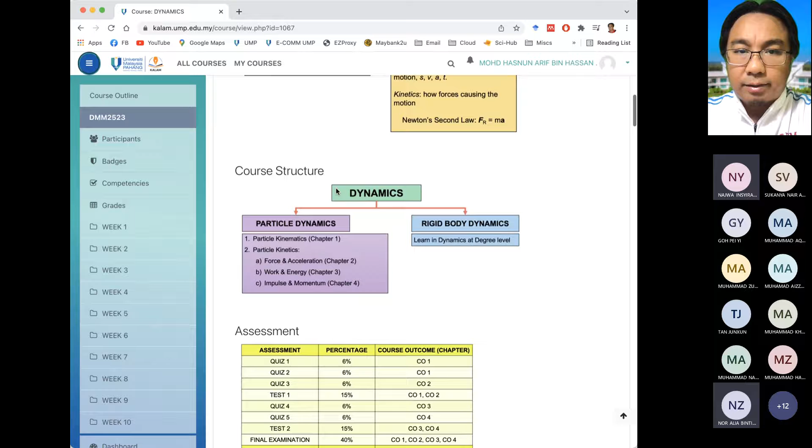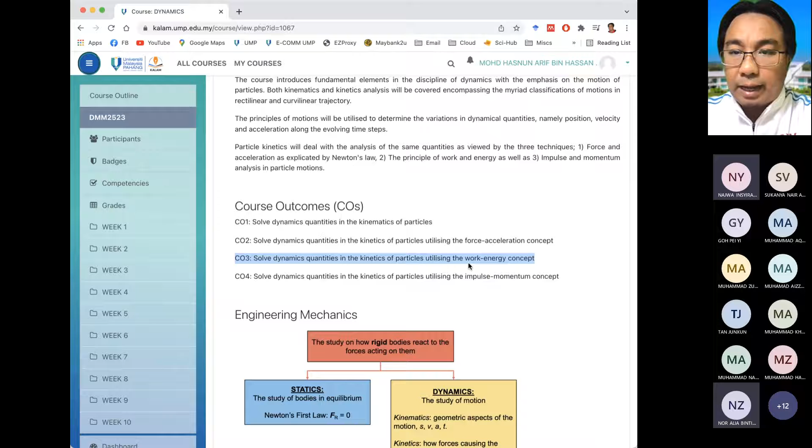Before I start, I want to highlight a bit about the content of the course. Let's look at the content of the course. We have covered course outcomes number 1 and number 2, based on the chapters. We finished chapter 1, we finished chapter 2. Now we are discussing chapter number 3, which is solving dynamics quantities in the kinetics of particles utilizing the work energy concept. So we are currently learning about work and energy.

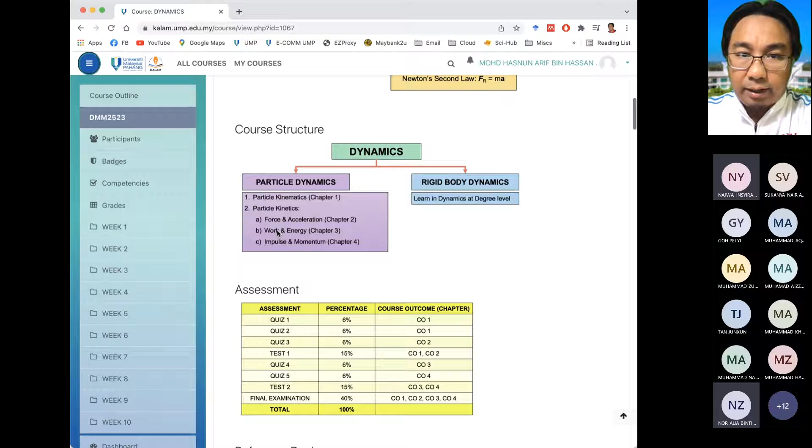Basically, like what I have shown in the course structure, we are currently at chapter number 3.

Now I would like to talk about the assessment. As we discussed in the previous class, most of you agreed that we are going to repeat quiz 1 and quiz 2. So far what we have conducted is quiz 1, quiz 2, and test 1. In total that's 6%, 6%, 15%, so 27% altogether of the assessment we have conducted.

I am planning to do the quizzes: repeat quiz 1, quiz 2, and quiz 3 which we haven't done yet, covering chapter number 2, plus quiz 4 covering the chapter we are currently discussing, which is chapter 3.

I am planning to do all the quizzes, quiz 1, quiz 2, quiz 3, quiz 4, on Monday next week. We will do this face to face in Dewan Kuliah 300 in FTKMA. Do you have any problem with that date?

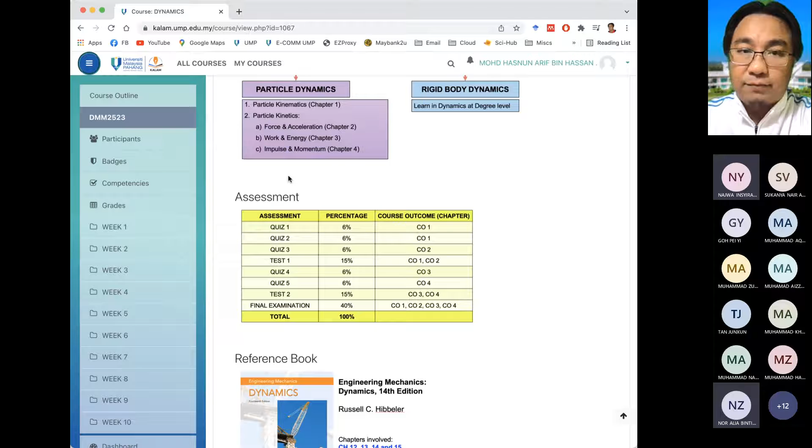Going back to the lecture that we have covered so far, I have uploaded the videos for lecture week 9, which we did online through Microsoft Teams. This is the video, and this is another video from last semester, so you can watch both videos. Perhaps it will increase your understanding on the topic we are currently discussing.

This is week number 10. Basically last week was week 10 for 2 days, and this week is still week 10. So this is what we are going to cover today.

I have also uploaded the video from the previous semester, so you can watch these two videos, and the recorded video from today I will also include in week 10. By next week we will finish with chapter 3. Today I will cover the principle of work and energy as well as power and efficiency, and next week we will cover the conservation of energy, finishing chapter 3.

On Monday next week we will finish chapter 3 and also do the quizzes. On Wednesday we will go into the last chapter, chapter 4.

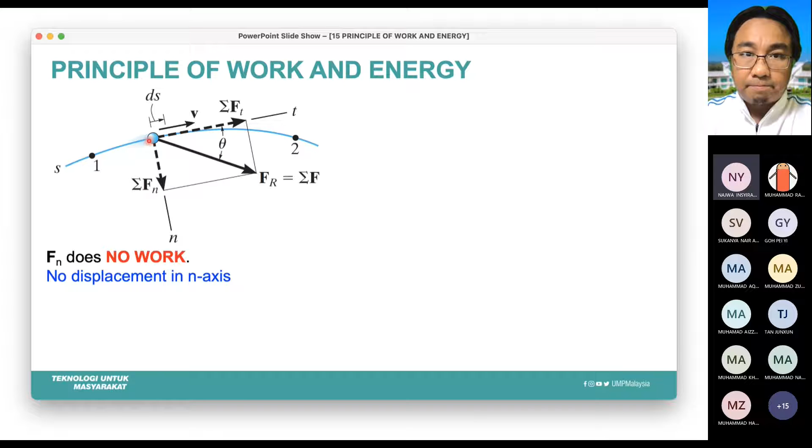So if we look at this particle moving from position 1 to position 2, the particle in blue, the object, is moving from position 1 to position 2. Since it is moving in a curvilinear path, kita boleh pecahkan dia kepada components in tangential axis, this is tangential axis T.

So akan ada force in tangential axis, dan kita akan ada normal axis pointing to the center of rotation, center of the circle, center of the arc of the path, pointing to the center. This is the normal axis, so we are going to have forces in normal axis as well.

So ini dia punya resultant force, force vector is in this direction. So force ini kita boleh pecahkan kepada tangential axis dan juga normal axis.

But because the particle is moving to the right in tangential axis, we know that normal forces in normal axis tidak menjalankan apa-apa kerja because there is no displacement in normal axis. Displacement hanya berlaku pada tangential axis. Displacement maksud dia objek ini bergerak pada tangential axis, objek ini tidak bergerak atas bawah pada normal axis. So tidak ada kerja yang dilakukan oleh forces in normal axis.

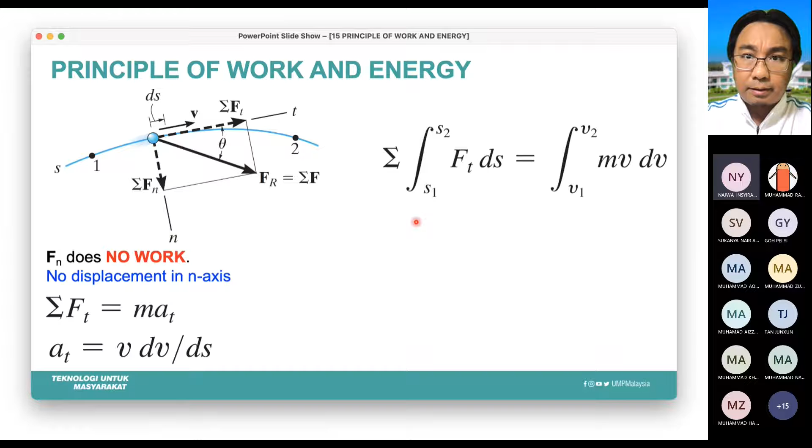From here, if you look at this equation, we can combine these two to get Ft ds. Kita rearrange ds ni ke sebelah kiri, so Ft ds is equal to mv dv.

So we can do the integration. Ini saya hanya menunjukkan macam mana equation ini terbit. Nanti you tak perlu derive equation ini dalam test ataupun final exam. What you need to do is just use the equation, tapi saya hanya menunjukkan macam mana equation ini datang.

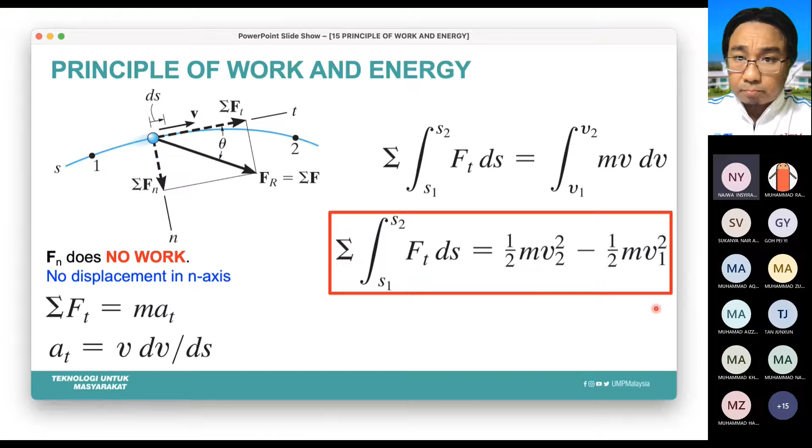So in the end, on the right hand side, mv dv, kita akan dapat v square over 2. So dia akan jadi 1/2 mv2 square minus 1/2 mv1 square, because the lower limit and upper limit is v1 to v2. Just focus on this equation here.

So what we have on the left hand side, F kali displacement, ds is the change of displacement. F kali displacement ialah work done. So bila kita tengok daripada S1 hingga S2, dia bermaksud work done to move from position 1 ke position 2.

So on the left hand side of this equation is basically the work done to move from 1 to 2. Work done we already learned in the last class - work done by force, work done by weight, work done by spring. On the right hand side, this is basically kinetic energy. 1 over 2 mv square is kinetic energy.

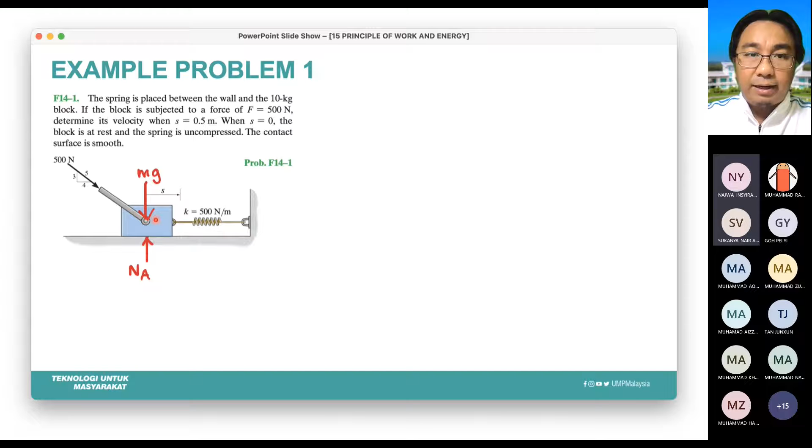So we draw the free body diagram - there's mg downward, N upward, and 500 Newton force which we can resolve into x and y axis. The x axis component is 4/5 times 500. I already explained last week how you get this - this is trigonometry using the triangle given below.

And the component of force in y-axis is 500 times 3/5. So from this we know that mg, N, and also this component of force are not doing any work because the direction of these three forces are in the y-axis, while the block is moving in the x-axis. So all these three forces are not doing any work.

The ones doing work are only this component of force, 500 times 4/5, and also the spring, because the spring will be compressed. So the spring will do work and also the x component of the 500 Newton force will be doing work. So UF we already calculated last week is 500 times 4/5 times the distance.

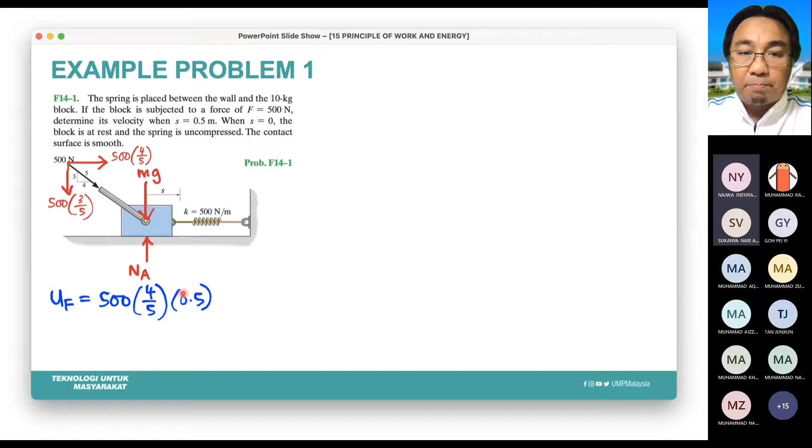Okay, the force dia, component of force, is 500 times 4/5, and to calculate the work done we have to multiply with the distance. The distance is 0.5. So traveling 0.5, we got 200 joule for UF.

And then US, work done by spring, is minus 1/2 times K. K is the spring constant, 500 Newton per meter, given in the question. So US is minus 1/2 K times S2 square minus S1 square. S2 and S1 are the elongation, pemanjangan spring.

Okay, so it says when S equals 0, the spring is uncompressed. Maksudnya pada position yang pertama, iaitu S1 ini, spring tidak ada pemanjangan, dia berada dalam panjang asal, the original length, uncompressed.

So from this statement, we know that S1 equals to 0, because the spring is uncompressed pada position yang pertama.

Pada position yang kedua, berapa banyak dia dah compress is equal to berapa banyak blok itu bergerak. So apabila blok bergerak 0.5, maksudnya spring itu compress sebanyak 0.5 juga.

Blok bergerak ke kanan 0.5, therefore the block will compress the spring sejauh 0.5 meter. So S2 pun sama dengan 0.5 meter, sama dengan distance of travel of the block.

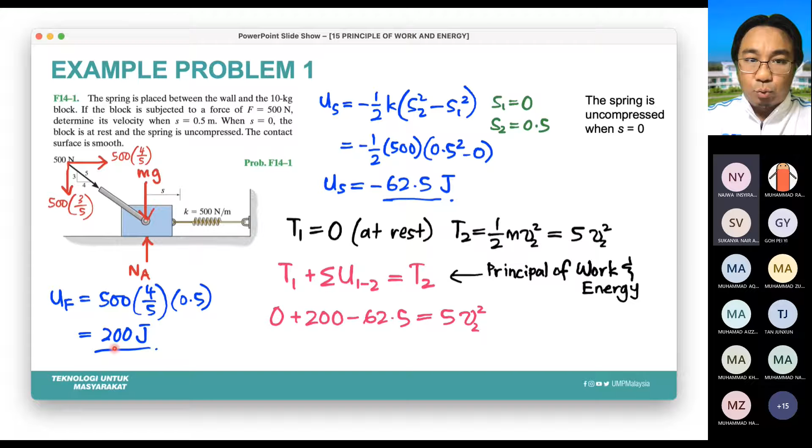T1 tambah total work done sama dengan T2, and now we substitute all the values. T1 sama dengan kosong. Total work done ini kita ada 200 minus 62.5, so plus 200 minus 62.5. T2 is 5 V2 square.

So then we have V2 square dalam equation ini, which we can solve. 200 minus 62.5 dapat berapa? Bahagikan dengan 5 dan you have to square root it to get V2 equals to 5.24.

Meter per second. So by using the principle of work and energy, we are able to solve this problem to calculate the velocity. Do you have any question?

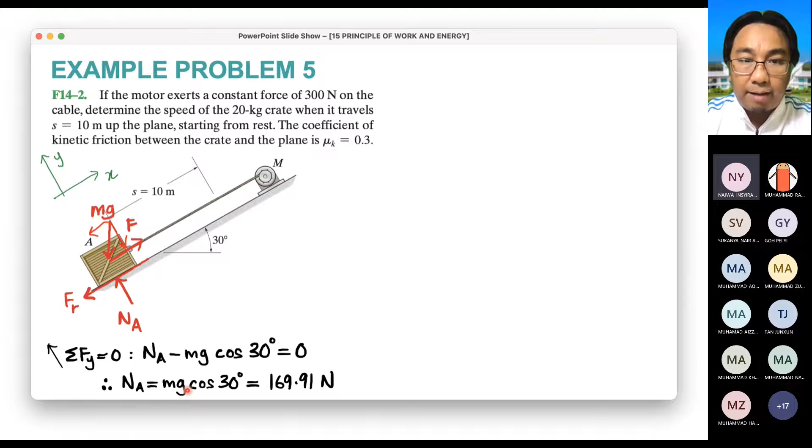Where does the 30 degrees come from? It comes from here, since this angle is 30 degrees, the angle down here is also 30 degrees. So with mg cos 30 degrees, you get the component. From here, we can get the value of NA: NA equals mg cos 30. Bringing mg cos 30 to the right, you get NA equals 169.91 Newton.

Once we have the normal force, we can calculate the friction force. Friction is mu K times NA, so 0.3 times the NA we just found, giving FR equals 50.97 Newton. Once we have the friction force, we can calculate the work done by the friction force.

Remember, friction force ini bertindak ke arah yang berlawanan, bertentangan daripada arah box ini bergerak. Therefore, bila kita calculate work done by friction, kita kena jadikan dia negatif. So UFR, work done by friction, adalah minus friction kali delta S. Delta S ni berapa jauh the box has travelled, iaitu 10 meter. So you get minus 50.97 times 10 sama dengan minus 509.7 joule. Ini work done by friction.

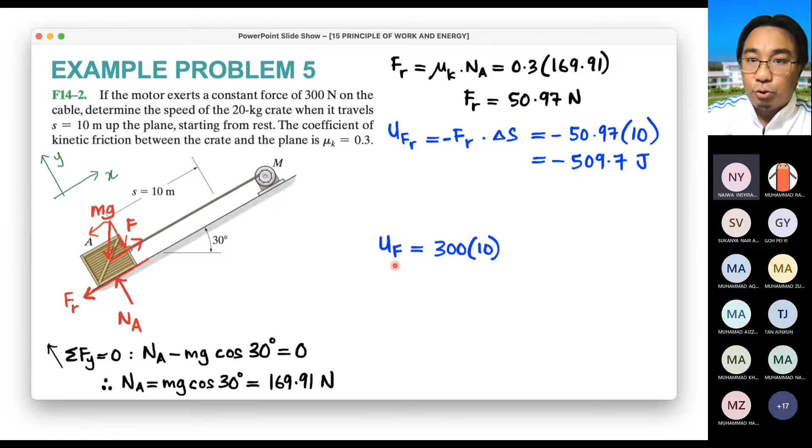Next thing is to calculate the most easiest, work done by the force exerted by the motor, 300 Newton. So UF sama dengan 300 darab dengan distance travel juga, iaitu 10 meter. So 300 times 10 meter you dapat 3000 joule. Ini work done by the force of the motor, UF.

Tadi UFR, work done by friction, negatif because friction bertindak pada arah yang bertentangan. Okay, what's left is the work done by weight. Sebab weight ada perubahan, weight pada asalnya kotak ini berada di bawah, kemudian kotak tu naik ke atas. So definitely there will be change of height, akan ada perubahan tinggi. Box tu bergerak dari bawah naik ke atas.

So there will be work done by weight. UW is minus W times delta Y. Okay, how do we find delta Y? Please pay attention. Basically, if you look here, the center point of the box is the center of gravity, saya tulis sebagai G di sini. Ini position number 1, position yang pertama. Apabila box dah bergerak 10 meter, G akan also travel 10 meter. So ini yang kita nak cari, how much the center of gravity G has go up untuk kita dapatkan delta Y.

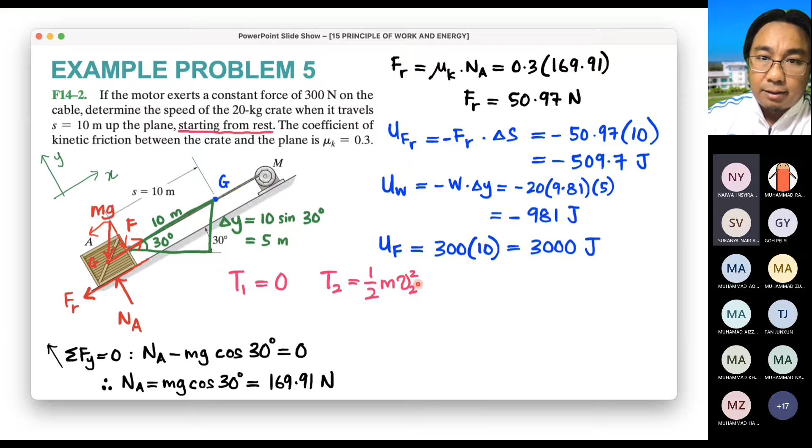Okay, so V ni yang kita nak cari. Kita tak tahu lagi. M is 20 kg. So we have 10 V2 square. T2 is 10 V2 square. So now once we have all this, we can combine into the principle of work and energy.

T1 plus total of U, total work done sama dengan T2. Okay, so 0, T1 is 0, and then we have minus 509.7, minus 981, and plus 3000. Ini total work done lah, based on dia punya ni.

That's why minus sign ini is very important. Kalau you tersilap, katakan you letak ini sebagai positif, then your final answer will be wrong. So it is very important to make sure you get the sign correct, sama ada dia ialah positive sign ataupun negative sign. Okay, so you kena always check lah.

So for example, work done by weight ini, kalau objek tu bergerak ke atas, mesti work done itu negatif. Kalau dia bergerak ke bawah, work done akan jadi positif. Dan juga work done by force pun kena tengok. Kalau force itu bertindak sama arah dengan motion, dia akan jadi positif. Kalau force itu bertindak opposite direction of the motion, dia akan jadi negatif.

Okay, so once you have all this, kita boleh solve. Kita tambah tolak-tolak dan tambahkan dia dengan 3000, bahagi dengan 10 dan square rootkan dia to get V2 equals to 12.29 meter per second.

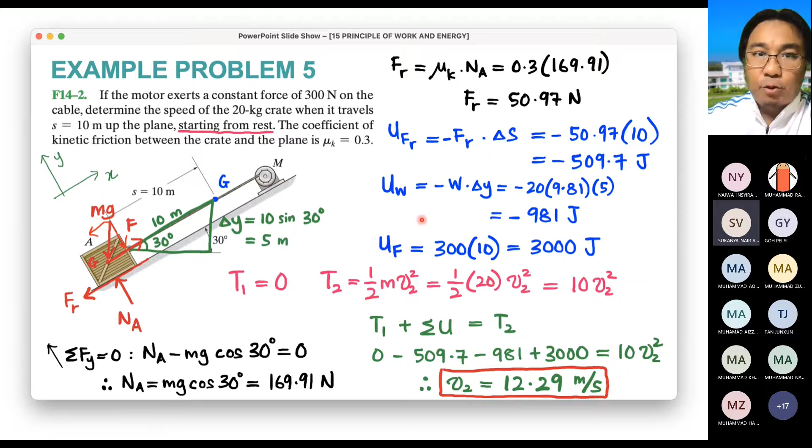Okay, ada lagi soalan lain? Okay, if there's no more question, I would like to show one more example. Okay, this is a much interesting example to share with you. And then we will go into the next subtopic, which is a very small subtopic lah, iaitu power and efficiency. Okay, but this is the most important one. I want you to focus on this topic, principle of work and energy.

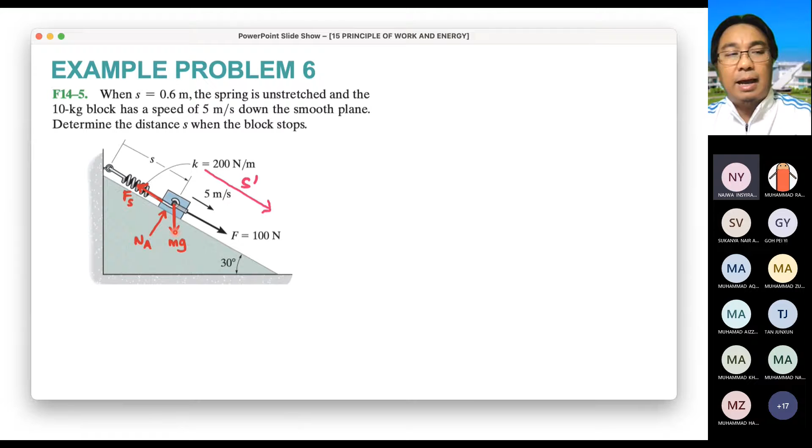So basically ada tiga force yang akan buat kerja lah, sebab kotak ni akan bergerak dari atas, dia turun ke bawah sampai satu point. So bila ada perubahan tinggi daripada atas ke bawah ataupun daripada bawah ke atas, weight akan buat kerja. Okay, weight akan buat kerja. So please remember that. So daripada 4 force ini ada 3 yang akan buat kerja: force F 100 Newton, force spring, dan juga weight.

Okay, and then I forget to tell you that the question says the smooth plane. Maksud dia tak ada friction lah, tak ada friction yang terlibat. Okay, so let's calculate, dekat sini saya lukiskan kotak ni telah bergerak lah. So basically you can imagine kotak ni dia bergerak sampai ke sini. Okay, sampai ke bawah ni.

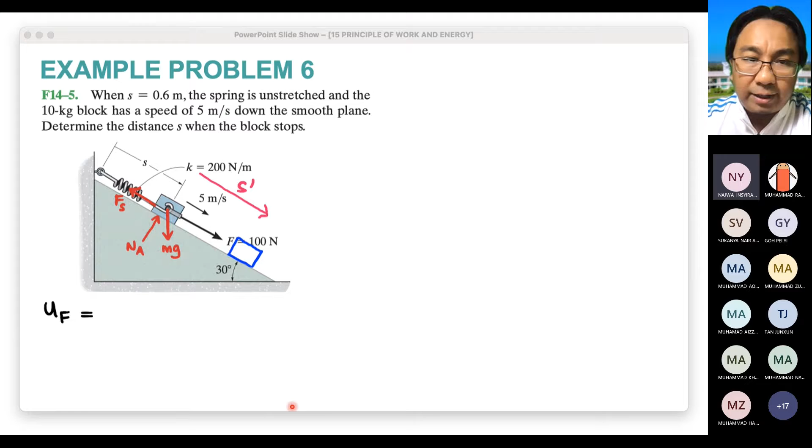Okay, so kita calculate yang paling mudah dulu, iaitu work done by 100 Newton force ini. Apa work done by 100 Newton force ni? Let me call Muhammad Syafiq, ada? Muhammad Syafiq, are you there? Tak ada? Chia Zhifeng ada? Yes, sir. Okay. Chia, so how do you calculate UF, work done by force 100 Newton? 100 times 0.6.

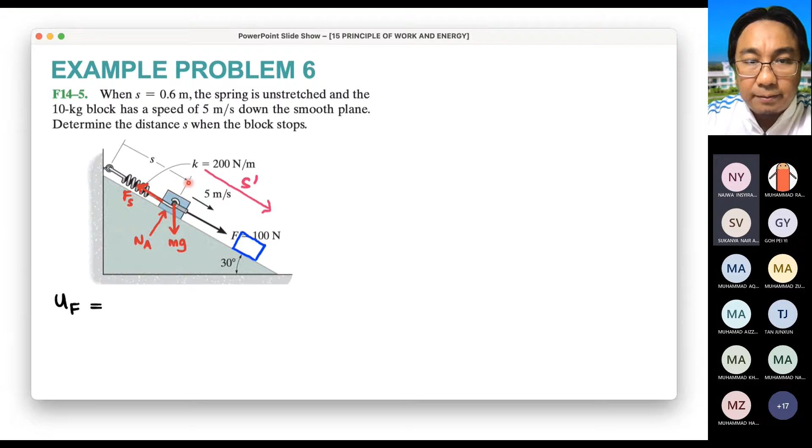100 times 0.6. Are you sure? Yes. Okay. Let's read the question again. It says when S 0.6. Maksud dia S 0.6 ini at this position. At this position, which means that 0.6 is the initial position. Let me write this down.

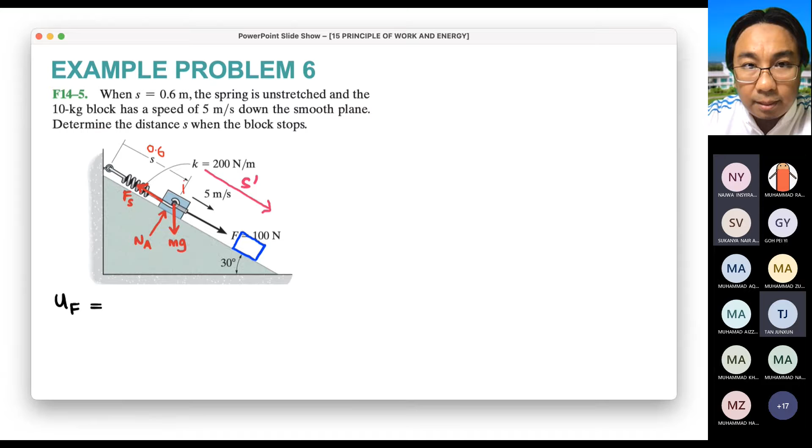Okay, this is 0.6. Okay, 0.6 is from here, this is 0 until here, 0.6. So this is position number 1, dia start dekat sini. And the box move to here, position number 2, which is down here. So now we are not talking about 0.6, tapi we are talking about this S here, which is unknown. That is why the question asks us to determine the distance S. So basically, kita belum tahu lagi what is the distance yang box to travel.

So to calculate UF, is basically 100 times S prime ini. 100 times S prime. This is the distance from position 1 to position 2, which is S prime. So you don't know what is S prime yet, this is what we are going to calculate. Do you understand, Chia? Yes, sir. Okay. Alright, so we'll continue. So UF is then 100 times S prime lah. Itu saja yang kita boleh calculate because we don't know what is the value of S prime yet.

Okay, now we move on to work done by weight. So ada weight, ada change of height daripada position 1 ke position 2. So you can calculate work done by weight is minus W times delta Y. So here we need to know what is delta Y. So again, I like to draw the triangle.

So for you to understand better, okay, so we have a triangle here. Delta Y is basically this side of the triangle lah, yang tinggi ni, this will be delta Y. Okay, you have the hypotenuse of the triangle is equal to S prime. Okay, I forgot to put the apostrophe here. This should be S prime, and this is delta Y, yang tegak ni, yang vertical. So this is delta Y.

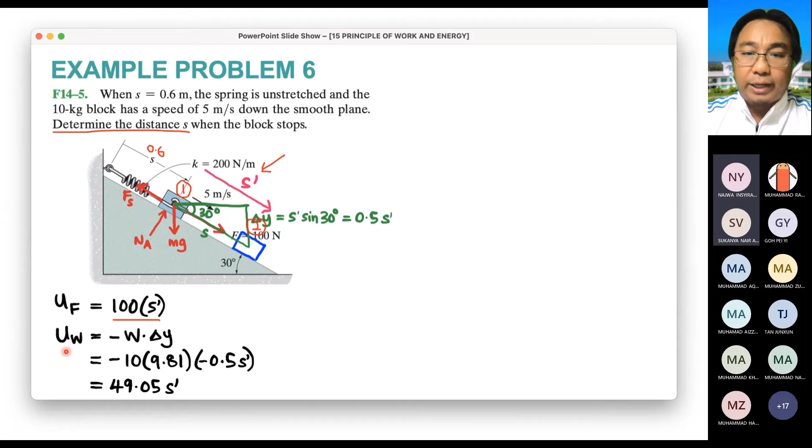Now let's move on to work done by spring: minus half times K, where K is given as 200 Newton per meter, the spring coefficient. S2 is unknown. S1 - it says here that at the first position, the spring is unstretched, so we know S1 equals 0. There is no S1 because at the start the spring is at its original length, so there is no compression or stretch. S1 equals zero, remembering S1 is the compression or elongation of the spring.

S2 is then equal to S prime, because from the original length of the spring it moves down to position number 2. So how far the spring has elongated is a distance of S prime - the elongation equals S prime. So S2 squared is S prime squared. So minus half times 200 times S prime squared gives us US equals negative 100 S prime squared. This is what we have.

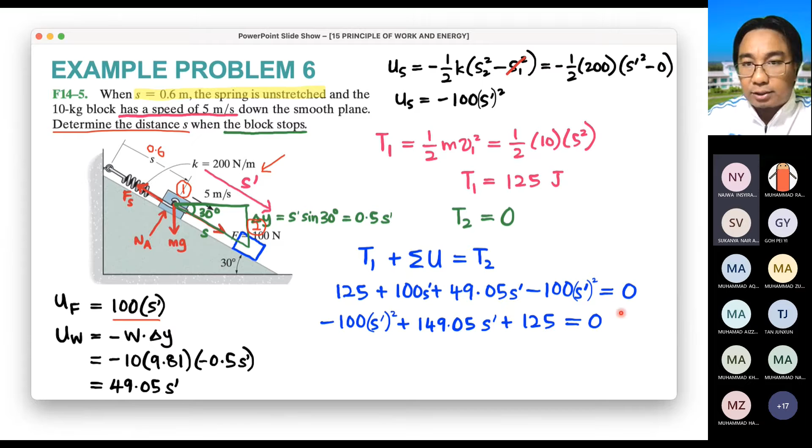T1 plus total work done equals T2. So T1 is 125, we bring that here. Total work done brings together all the terms with S prime: 100 S prime plus 49.05 S prime minus 100 S prime squared equals T2, which is 0. Now you can rearrange - bring the squared term to the front, so it becomes minus 100 S prime squared plus, adding the rest together, 149.05 S prime plus 125 equals 0. Now you see an equation with S squared, S, and a constant value.

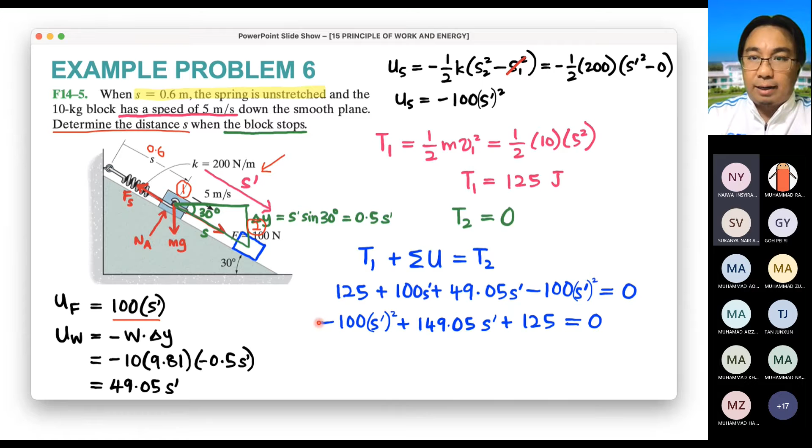So how do we solve this? You can use your calculator. I have an example here - let me show you how. Use mode, click mode and change to equation. Click number 1 for equation, and there are unknowns options but choose to the right - choose degree, now choose 2nd degree. Why choose 2nd degree? Because the S prime term is squared, so that means it's second degree.

Now it asks for A. A is the first one, the one with the square. So you key in minus 100 for A.

Now you press equals, and then it will ask for B. B is the second one, 149.05, positive. So you key in positive 149.05, press equals, and C is the last one, 125.

Now when you press equal, it will give two answers, X1 and X2. You are going to exclude the negative answer. X1 is negative, this is not correct. What you want is the positive answer because there's no such thing as negative distance, distance must be positive. So the negative one is the wrong answer.

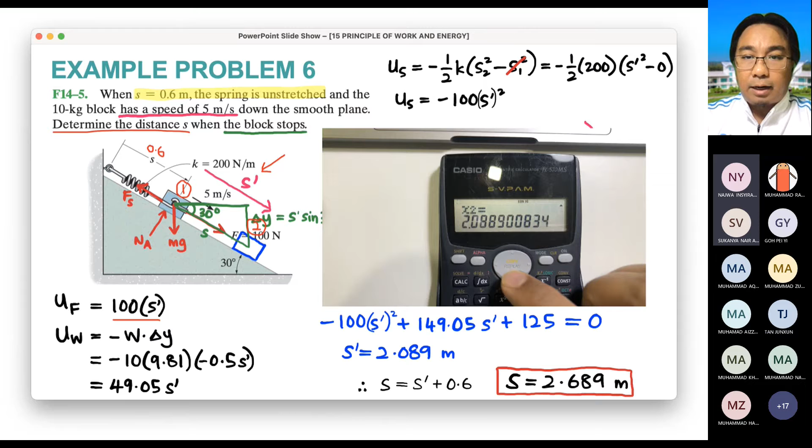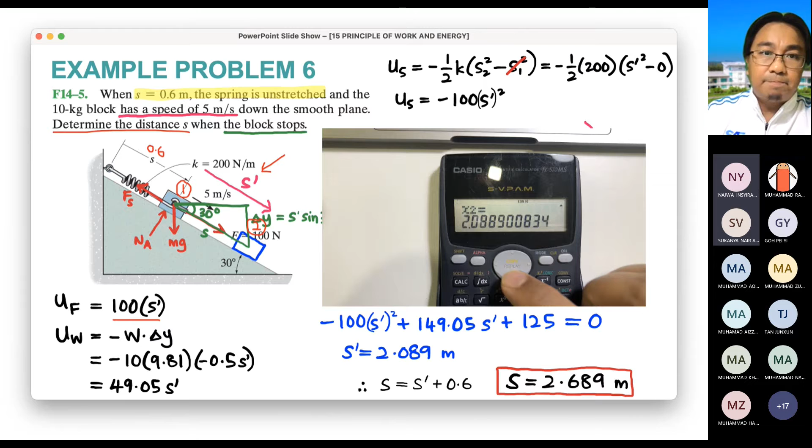Alright, do you have any question? Any question about this question? Okay, if there's no question, I will continue to the next subtopic.

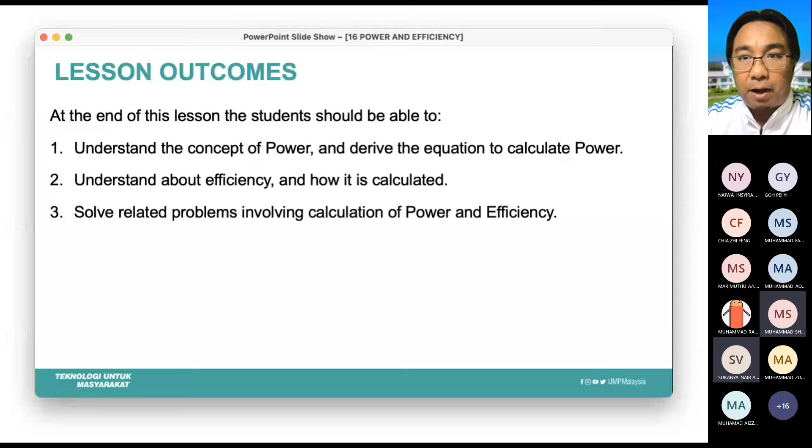This is a very small subtopic, power and efficiency, just for you to know. In this lesson we will understand the concept of power, how to calculate power, and understand about efficiency. Power generated by a machine is the work done within the time interval.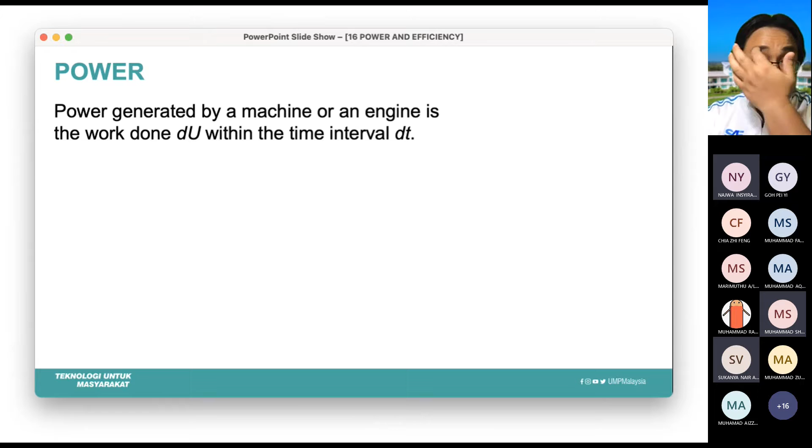We already learned work done and also kinetic energy. Now from the work done that we calculate, we can calculate the power generated by the machine, the motor for example, within a time interval dt.

P is equal to du divided by dt. This is the definition. So how to calculate? We know that du is F times dr. du is work done, force times displacement, r is the displacement.

Now F dr, du over dt, P is du over dt. So we have F dr over dt equals, we can take out the F. So we are left with F times dr over dt.

Do you know what is dr over dt, or ds over dt? Anyone? We learned this earlier. First time we learned in dynamics is ds over dt. What is ds over dt? Velocity, exactly, thank you Marimuthu. ds over dt is the velocity. So how to calculate power is basically to multiply the force with the velocity.

That is it. How to calculate power? Force times velocity. How to calculate work done? Force times distance. So you have to understand the concept. Force times distance is the work done. Force times velocity is the power.

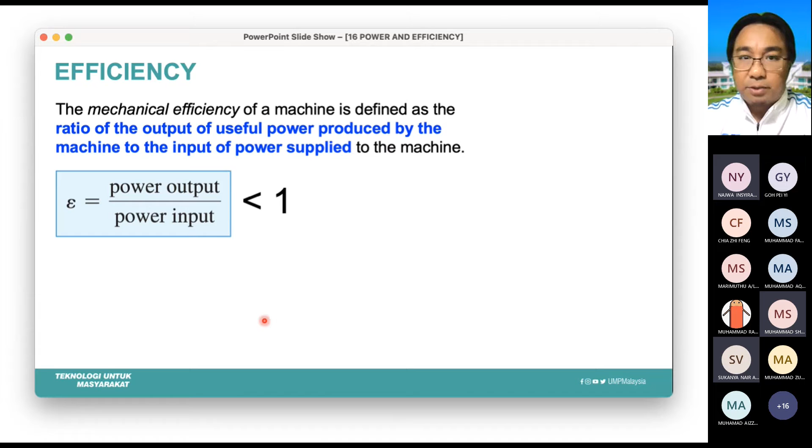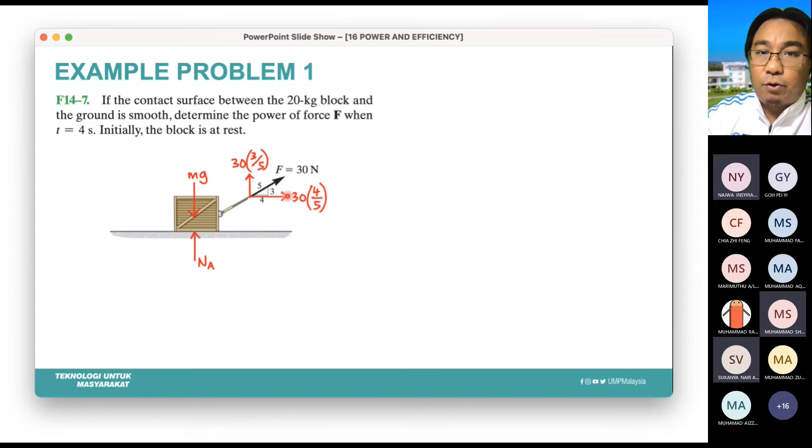So we draw the free body diagram. There's weight pointing down, there's normal force, but these two are not doing any work because the distance traveled is to the right. This component is also not doing any work. What does the work is only this component, 30 times 4 over 5. Work done in x-axis only. So now we go back to chapter 2 a bit to get what is the velocity.

So in chapter 2, we learn F equals ma in the x-axis. In the x-axis, we have 30 times 4 over 5, the component of force, equal to ma, where m is 20 kg, so 20 times ax. So we have ax is 1.2 meter per second squared. And we know that this force is constant.

So we can use the constant acceleration equations to get the velocity. We know V naught equals 0, because the block is initially at rest, so initial velocity is 0. So we have V equals ax times t. We already have ax, and time t is given in the question, 4 seconds. So we get velocity is 4.8 meter per second.

Therefore, power is force times velocity. But remember, not 30 Newton - only the force that does work, which is the component. The other component does not do work because the box does not move up and down, only to the right. So only this component of force is doing work, so you have to take Fx only.

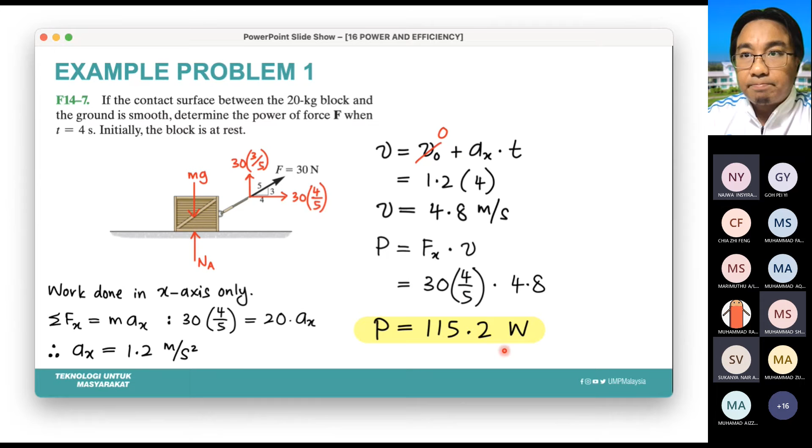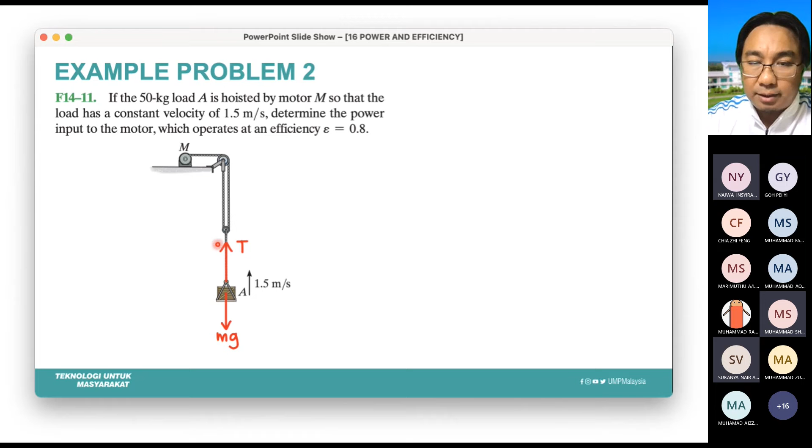Now efficiency is given. So we can draw the free body diagram, mg and tension. There's a cable pulling the weight, the box, so there must be tension in the cable. So we go back to chapter 2 to get...

...the tension here. We know that V is constant - it says constant velocity, so when V is constant, ay is equal to 0. Constant velocity means there is no acceleration in the y-axis. So when there is no acceleration, we can calculate the tension: T minus 50 times 9.81 equals 0. The right hand side is 0, so T is 490.5 Newton.

The power output is the tension times the velocity. Tension is the force, times the velocity 1.5, so 490.5 times 1.5, you get 735.8 watt.

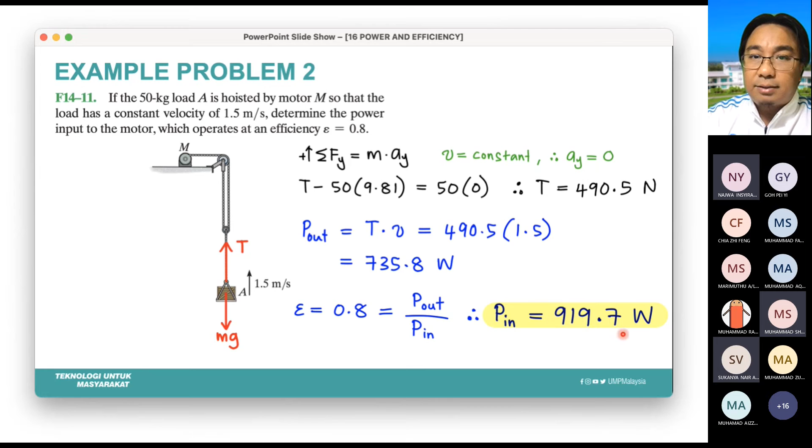But the efficiency is given, so this is not the actual power by the motor. The actual power by the motor must be higher because there is an efficiency of 0.8. So efficiency 0.8 is P output divided by P input. This is P output, so we get P input is 919.7 watt.

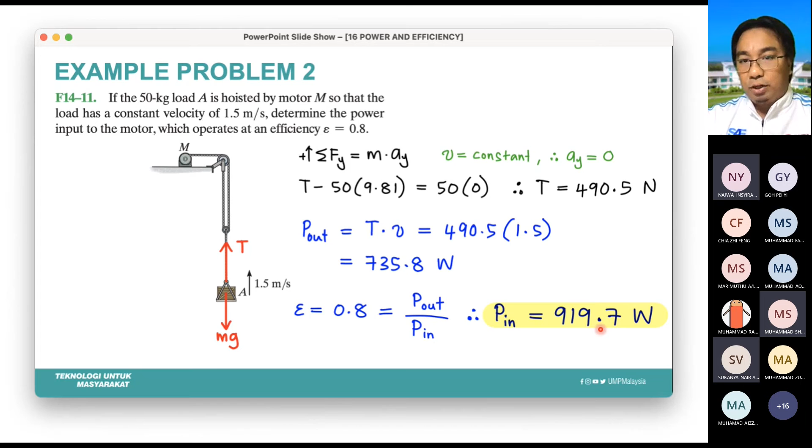So that's all I would like to cover regarding power and efficiency. This is just a very small subtopic, just for you to know that power is force times velocity, and efficiency is the power output divided by power input. So we have learned about power and efficiency of a machine or engine, and we have solved several problems related to power and efficiency.